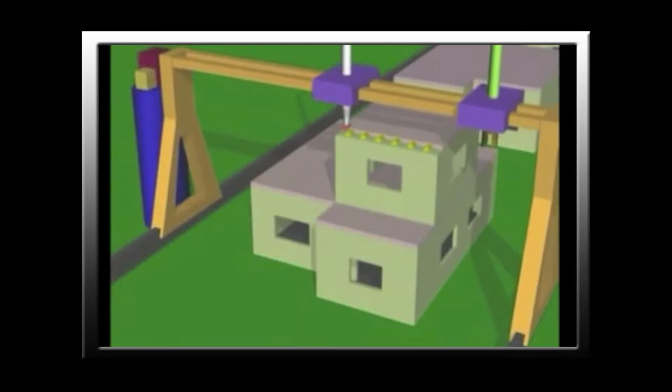Maslow, the renowned American psychologist, identified the pyramid of human needs, at the base of which are the two essentials: food and shelter. So shelter is the topic of my presentation tonight.

They are after finding ways to change the situation. However, what they're facing is a problem of conventional construction, the current construction methods that we employ. They are generally slow, labor intensive, and inefficient.

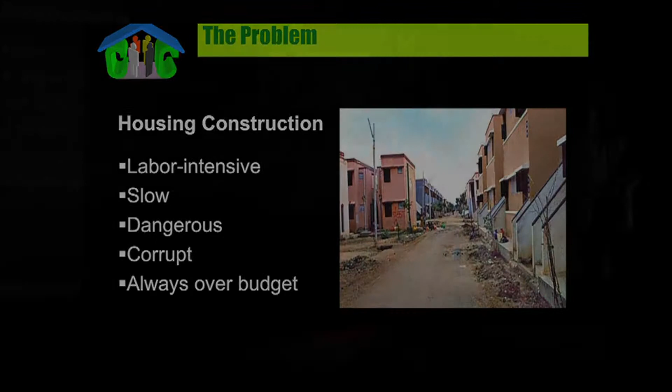If you look around yourself, pretty much everything is made automatically today. Your shoes, your clothes, your home appliances, your car. The only thing we still build by hand are these buildings.

Construction is the most hazardous job. It is more dangerous than mining and agriculture. In this country, it kills 10,000 people every year, and there are about 400,000 injuries every year. Eventually, these translate into cost to society and homeowners.

Construction, the way it's done today, is very wasteful and generates a lot of emission. And because of all the different trades involved and the difficulty of the management process in construction, the process is pretty corruption prone. It is very costly and is always over budget.

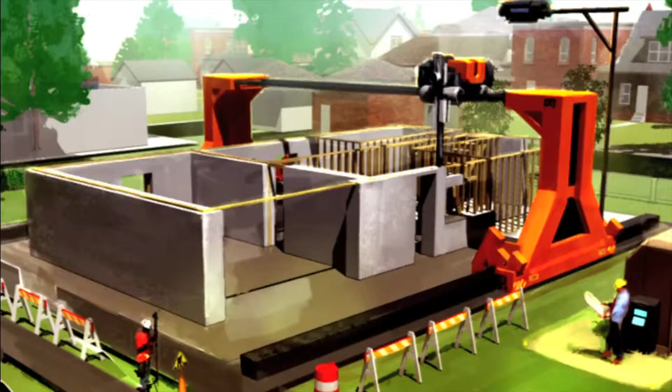So we have been focusing on finding a solution to this problem. Our solution basically benefits from advanced technology. I named this process contour crafting, and it is essentially a way of streamlining the process of construction by benefiting from the experience that we have gained in the domain of manufacturing.

In manufacturing, there's a process called CAD/CAM, computer-aided design, computer-aided manufacturing. A lot of things that you see are designed on computer and without any human interference are sent to the production machinery that automatically makes those products that you use. So we want to scale up those processes and bring them to the realm of construction.

This, of course, has been the desire of a lot of engineers and technologists. There have been problems and difficulties in such a transition. Recently, there has been development in the field of fabrication. You probably heard about 3D printing of 3D objects. So contour crafting is basically scaling up 3D printing to the scale of buildings.

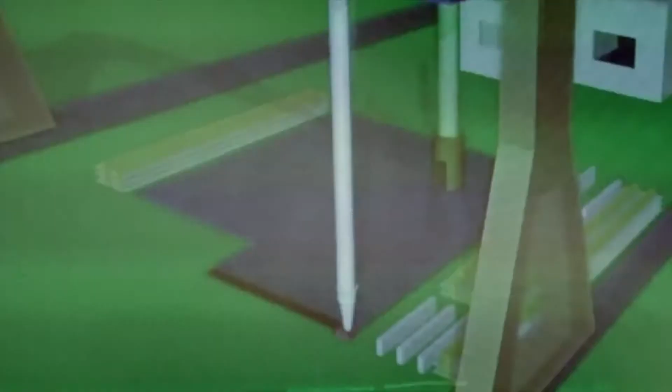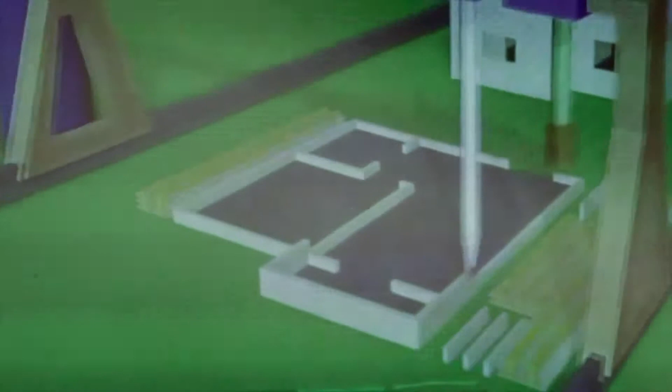This animation shows the concept. The material, which is cementitious material, initially concrete, is deposited through a nozzle, and the building is built layer by layer. In the process, a lot of things can be done, including automatic reinforcement, automatic plumbing, and automatic electrical network installation. And once the basic structure is done, there could be other automated processes that would do auxiliary operations such as finish work, tiling, and even painting using inkjet printers, the kind that print billboards. So in the end, the whole building can be ready in an unprecedented time.

We anticipate that an average house, like a 2,500 square foot house, can be built in about 20 hours, custom designed. The model you see here is pretty simplified because I didn't want to make the animation difficult for my students. But you can imagine the walls do not have to necessarily be rectilinear. They can use any kind of curve. Therefore, you can really execute very exotic, beautiful architectural features without incurring additional cost.

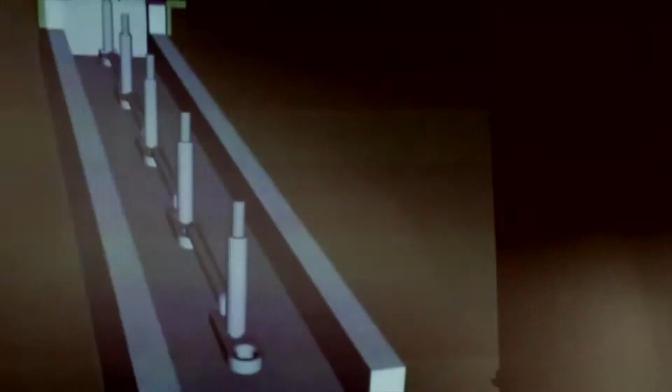These clips show how reinforcement, plumbing, and electrical installation can be done. So rather than using continuous rebars, we can have segments of rebar automatically inserted and assembled inside the building. This wall is being reinforced by a two-dimensional mesh of steel. Likewise, plumbing elements could be installed while the building is being erected. As you know, currently every one of these activities involves its own trade. So for electrical network installations, you can have these polymeric blocks with conductors that carry electricity and communication signals.

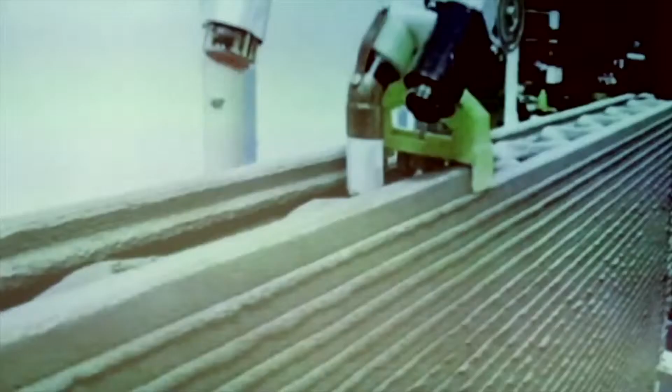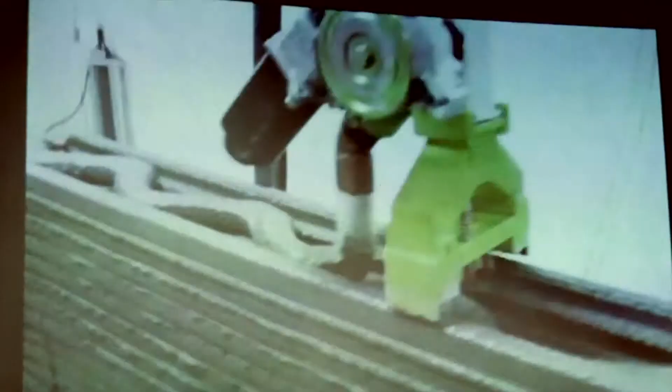Well, this is one of the machines that we've developed. As you see, the nozzle is secreting pretty dense concrete. This concrete is high performance, and it is mixed with fibers, composite fibers. It gives you a pretty good strength. This particular wall has a 10,000 psi strength.

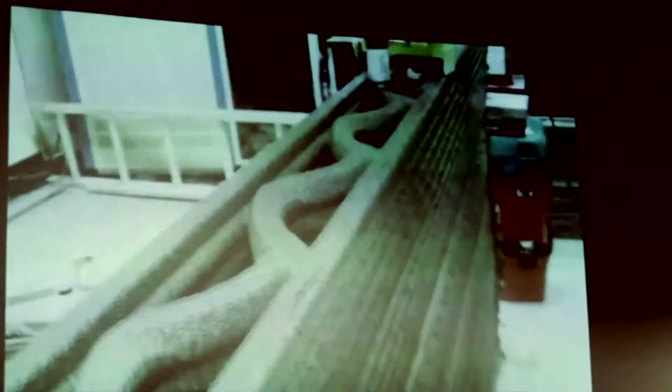The average concrete structures that you see typically are about 3,000 psi, pounds per square inch. This wall is hollow, therefore does not use as much material. It's lighter and has good heat insulation characteristics.

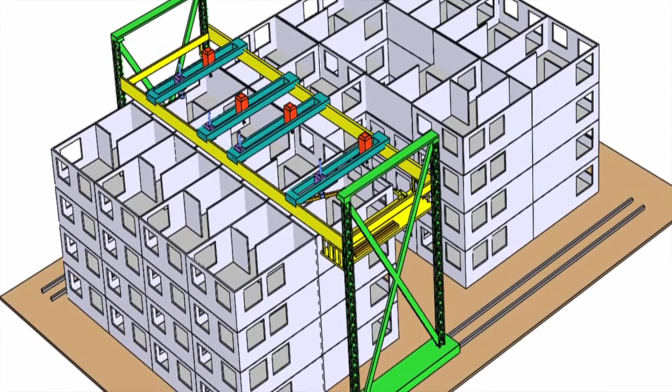This is a typical machine that will be used for this technology. This particular machine that you can see here can replace existing mobile homes, which are referred to as tornado magnets. You can have different kinds of configurations for these robots. This is like for a single detached residential building. You can have a multi-nozzle machine that will be good for large buildings. These nozzles work concurrently, or you can have the machine climb the building.

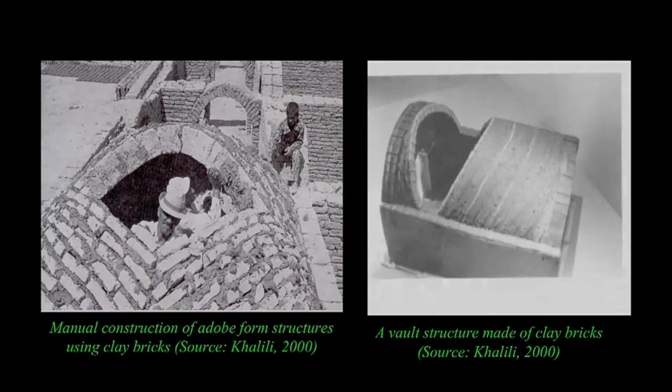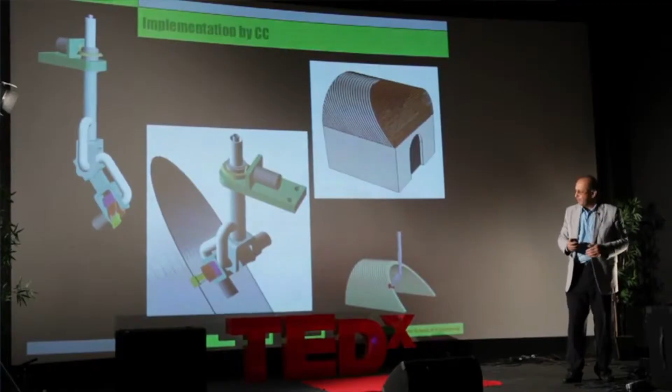Inside, these buildings can be pretty homey, organic, and the patterns used for building these are pretty ingenious, but those people are no longer accessible in a lot of places in the world, and if they are, they'll be very expensive. However, with robotic systems, we can mimic those patterns and build those beautiful structures automatically. And we can even use the in-situ material to build structures without support beams.

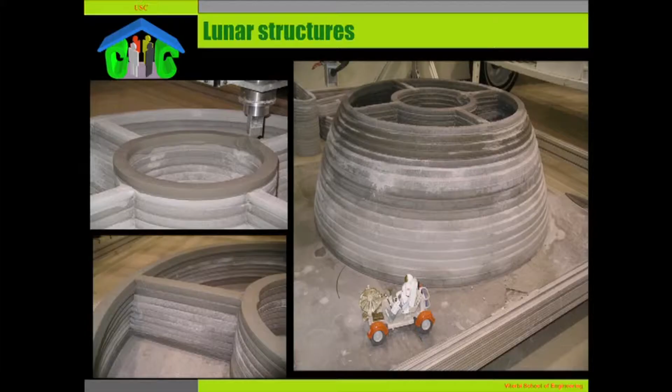So our current project, which is supported by NASA, aims at using the technology to build lunar structures, such as landing pads, roads, hangars for the landers, support walls, and radiation protection walls. So these are some of the structures that are built. This could be a lunar fuel vessel. What we expect to offer with this technology is significant reduction to the cost, by reducing the cost of financing, the cost of materials, and of course significantly reducing the cost of labor.

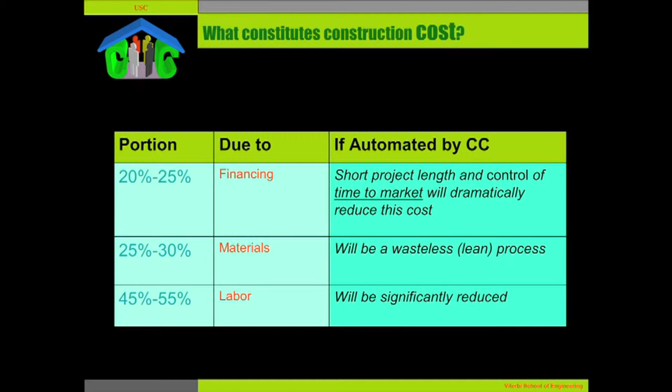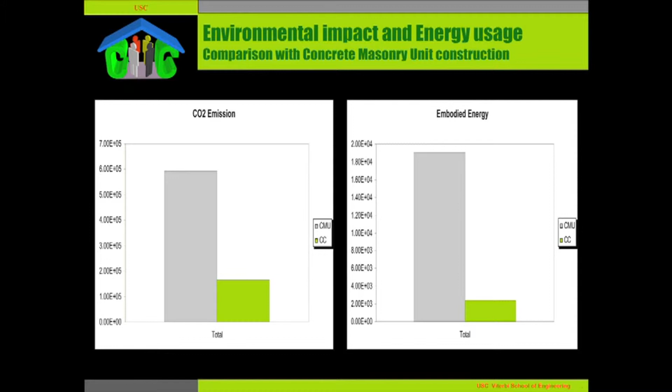Compared to emergency prefab modular and conventional construction, contour crafting will offer the highest architectural flexibility with a cost that is only higher than emergency building construction today. And as far as construction speed is concerned, nothing will beat contour crafting. CO2 emission is a small fraction of current emissions, and the energy usage by the technology is also very low. So therefore, the technology is extremely environmentally friendly.

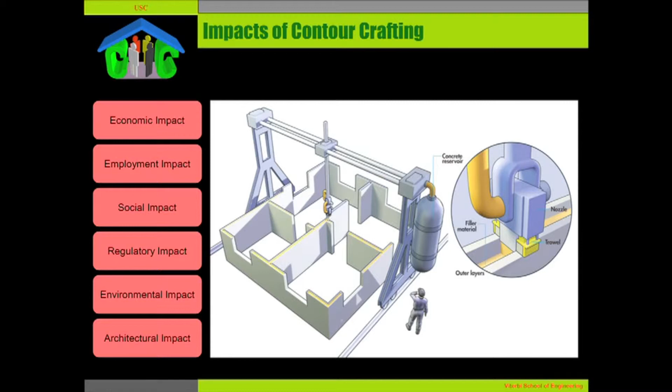Contour crafting, as a disruptive technology, will have a number of impacts, including economic impacts, employment impacts, social impacts, regulatory, environmental, and architectural impacts.

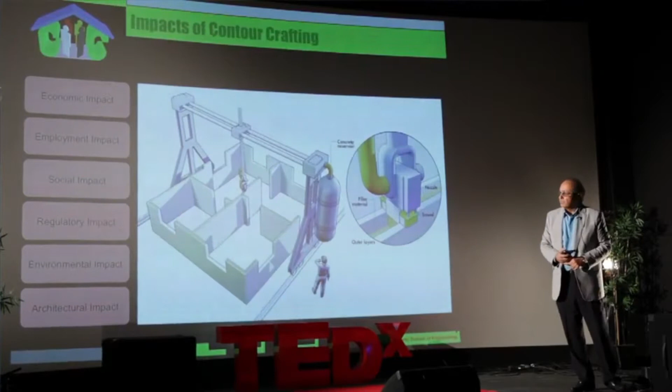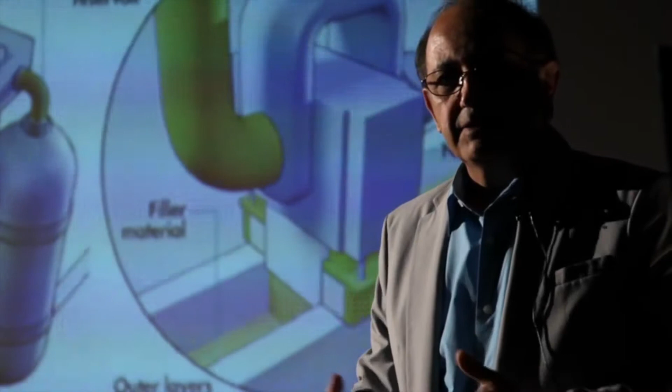With respect to employment impact, I should make a remark that there is a lot of concern about people being put out of construction jobs. The reality is that a lot of new jobs can be created in this sector as well. Currently, women and the elderly do not have much opportunity to work in construction. With new technologies like contour crafting, those groups can also be employed in more creative construction activities.

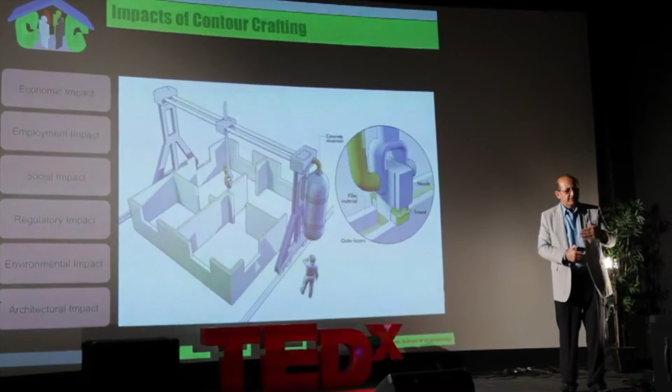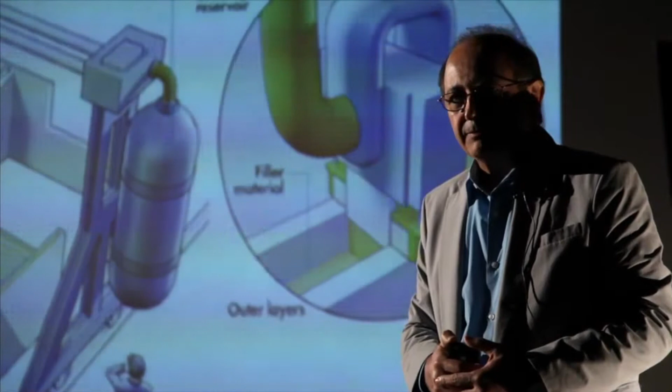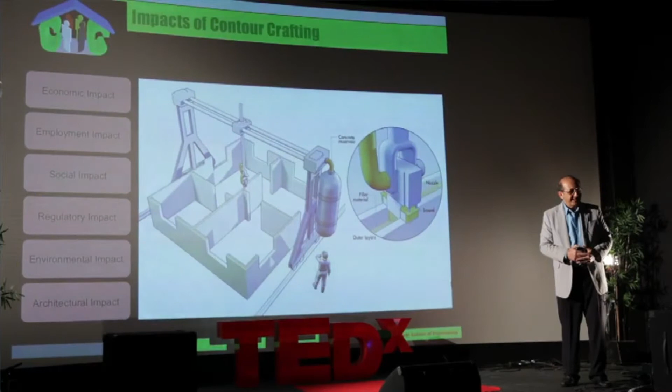At the beginning of the previous century, around 1900, 62% of Americans were farmers. Today, less than 1.5% are involved. The world did not come to an end as a result of agricultural technologies, and the same will be true for construction. There will always be better economies resulting from advancement and utilization of technologies that just make sense. Thank you.

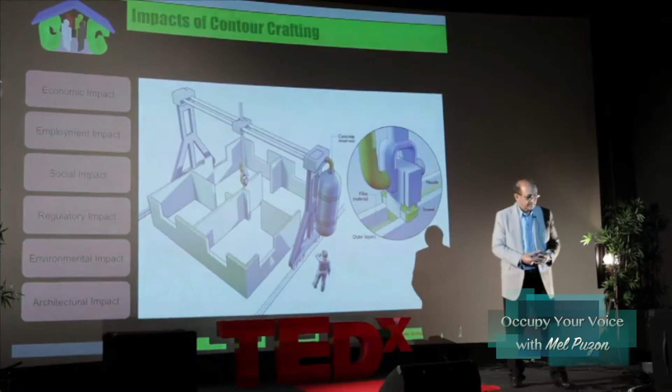Americans have been conditioned in their kind of society to get a different car next year, to buy a new television set or a tape recorder. We are radical as hell, but our political and social institutions have not changed. This is where we are stagnating, because we always equate any new idea with communism or regimentation, because we've been brought up to fear that which is new.

In 2011, it's becoming obvious that the machine has beaten the man. We're incredibly productive with far fewer people. We are more productive as an economy than ever before. An iPad app can do more than four workers. There are simply fewer jobs. The jobs that do exist now can have lower wages because, for obvious reasons, a lot of people are looking for a small number of jobs. The wages go down, and that has huge impacts on the middle class, and it ripples out.

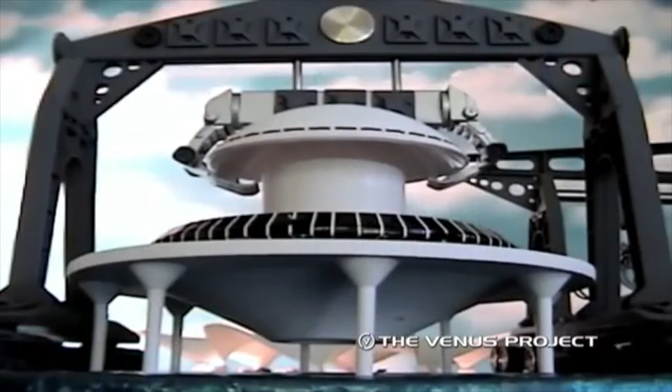How can we use our technology wisely so that there is more than enough for everyone? To achieve this, it's mandatory that the planning be based on the carrying capacity of the planet's resources. Our entire infrastructure must be redesigned and operated as coherent, integrated total systems. This means we must consider our entire global community as one unit that includes everyone, and plan accordingly. Only in this way can we use our technology to overcome resource shortages, provide universal abundance, and protect the environment.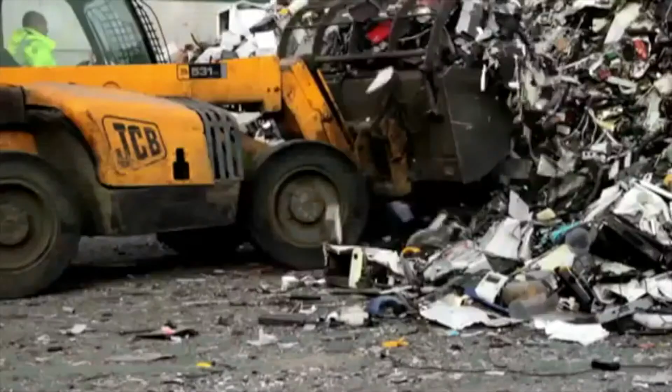If technology does not liberate all people for the pursuit of higher aspirations in human achievement, then all its technological potential will be meaningless. You always do a positive and negative study before you engage in the actual reconstruction of an environment.

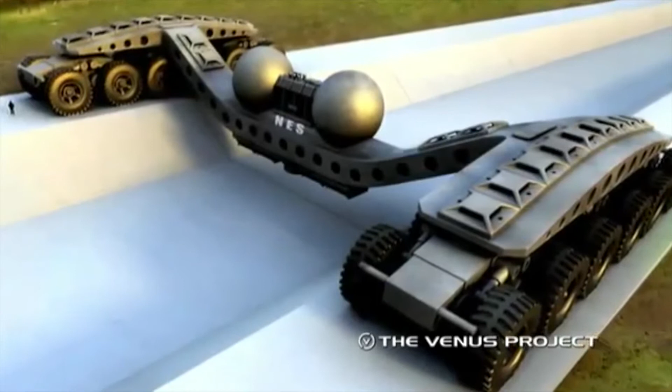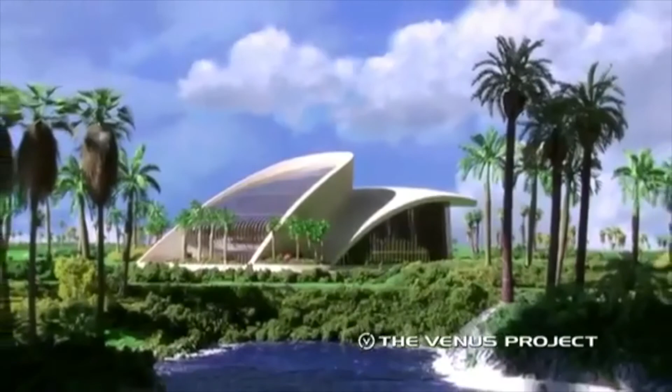It's all just talk unless there is a technical plan to organize and use resources to accomplish abundance. What follows are some of the many approaches the Venus Project provides for the entire social spectrum.

Today, more than half our population lives in cities that are polluted, dangerous, and waste energy. What we have to do is design a city as a living system, as an organism, as a university, so that all the cities of the future will be university cities that grow and continue to exchange ideas. The city will have a built-in transportation system, so there are no accidents and no unthought-out areas of technology. Medicine, botany, agriculture, the total system, one planning system.

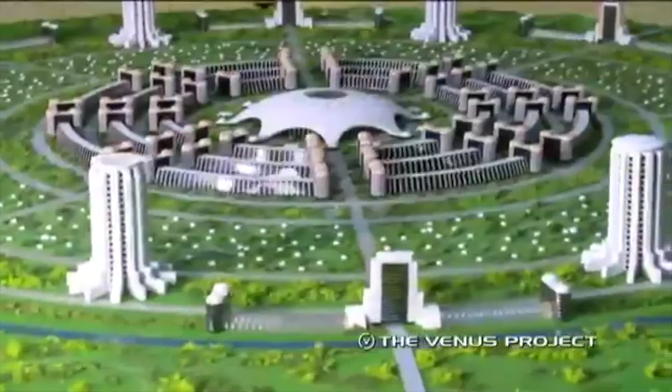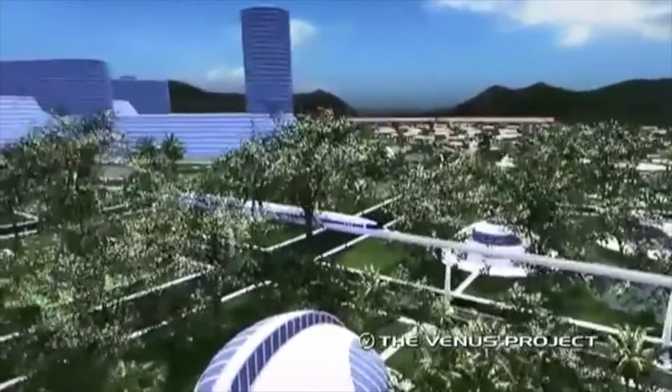It is actually better to build newer cities from the ground up than to restore and maintain old ones. Fresco uses a systems approach to designing new cities. They're desirable and pleasant places to live. The notion that intelligent overall planning implies mass uniformity is absurd. Cities would be uniform only to the degree that they would require far less materials, save time and energy, and be flexible enough to allow for innovative changes while preserving the local ecology.

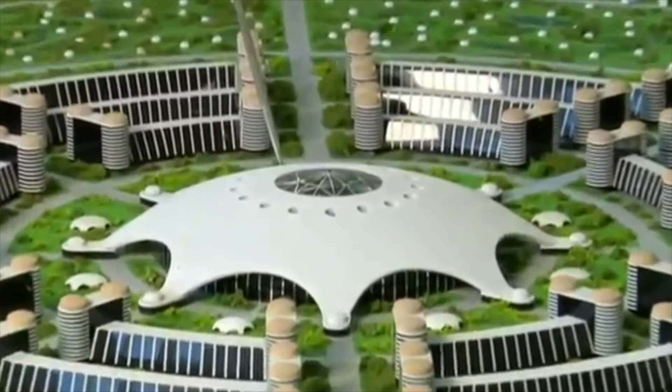If we design our cities to meet human needs, you don't have most of the problems that are prevalent today. In the Central Dome, you have childcare, schools, dental care, medical care. In the production and design of the cities, we work out one-eighth of the city system and then reproduce it, instead of having architects design each building and each structure, which is a tremendous waste of energy and talent.

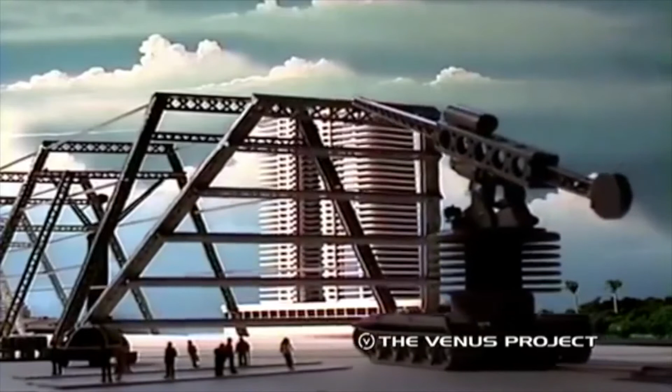When working on solving the housing problem for all the world's people, construction techniques would be vastly different from those employed today. Extruded and self-erecting structures could revolutionize and speed up construction processes. These lightweight, durable apartments could be produced as continuous extrusions and then separated and positioned in place by mega machines. The outer shells of these efficient structures serve as photovoltaic generators and heat concentrators.